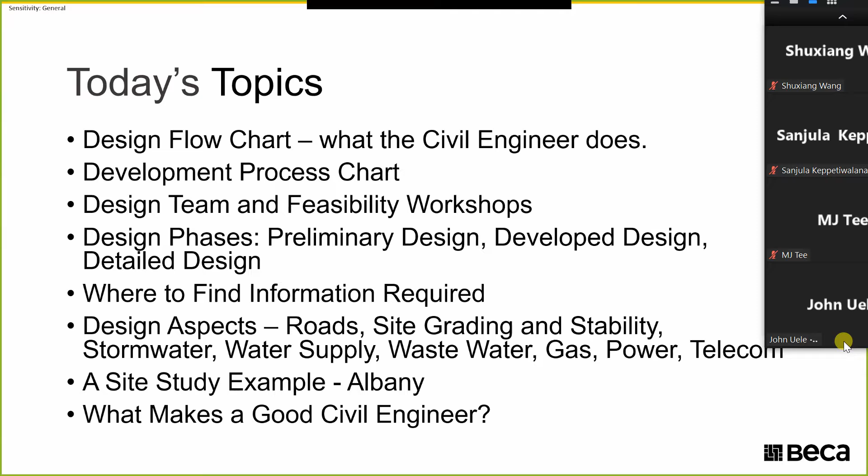So today's topic: Kerry will go through the design flow chart, what the civil engineer does, and explain the development process with a chart. The design team - people you should generally consult and involve for a subdivision project - step-by-step of the feasibility workshop, the 3 design phases: prelim, developed, and detail. Within these design phases this also includes consenting processes, and where to find information on the site and for the design. Kerry will then talk through a site study example in Albany, which we had previously done, and finally our 2 cents on what makes a good civil engineer.

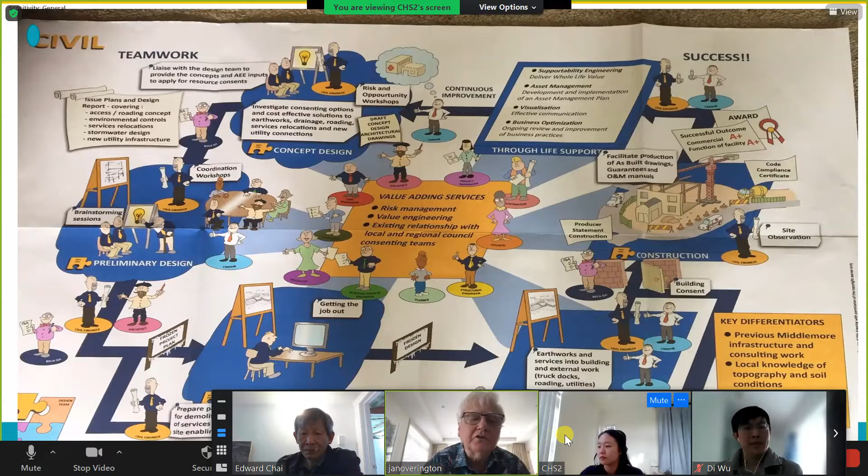It's probably at the developed design stage where a good portion of the work is done, probably 40 to 60% of the work is done during the developed design. That's when you're making sure that what you want to consent can be built and does meet the council's and approving authorities' requirements. Once you get a resource consent, you don't want to have to change it because something has gone wrong or something's too expensive. So you're putting your money into that phase so that when you go forward with consenting, you're in a good position to know that what you're proposing is pretty robust.

Then you go into what they term the detailed design, which is more pulling things together to enable you to tender the works. This would be done at the same time as you're consenting the works. So as the developed design has been developed and it goes off to council for approval for consent, you're then working on the detail, the much finer detail, and the contractual requirements to come up with a contract and a builder to enable the works to be done.

And then we go from the detailed design tendering stage, you then select a contractor who starts to build the works. And then once they're built, it's the approval of those works back to make sure that they've met all the consent conditions, the engineering conditions, and the legal conditions. So in essence, that's the process. I just felt that diagram was probably a good graphic way of indicating what you're doing at each of these phases. We'll expand on that more later.

So that's a flow diagram and the normal way that a design is carried out with those preliminary, developed, detailed - it's the concept feasibility, preliminary, developed, detailed, and then into construction. And then, don't forget, after the construction, the most important part is making sure that you can then get sign off. It's a little bit like getting code compliance for a building.

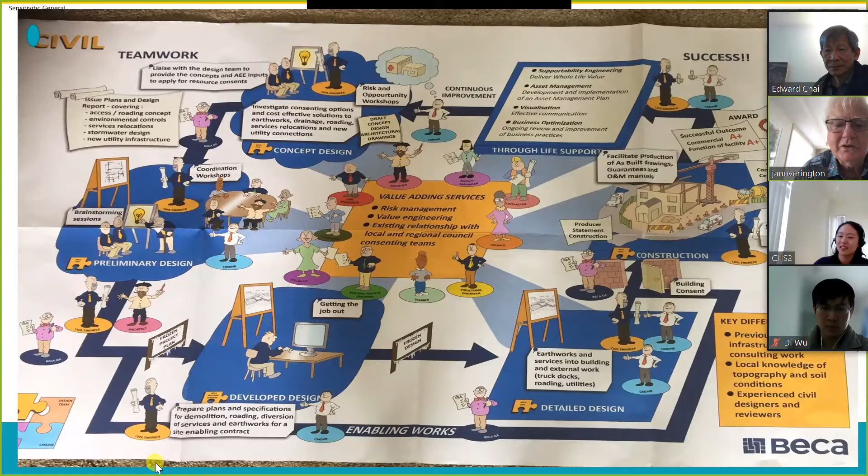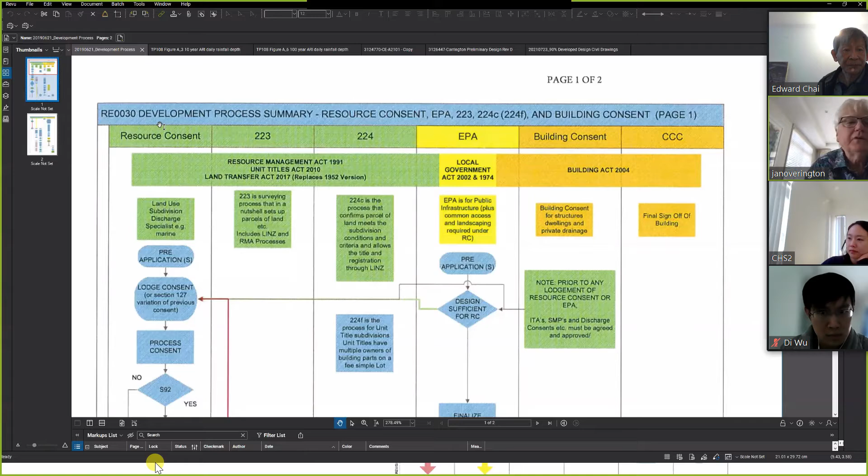This slide here is from Auckland City's design manual, and it's a really good flow chart to tell you what each phase of development is. So on the top left there, you'll see it's got resource consent. So that talks about what you do to develop the resource consent, and it's got the prescribed processes.

So when you get down to where it says S92 - S92 is Section 92 of the Resource Management Act - that's a process where if council feel that they don't have enough information, they will request more information. At that time, the processing of the resource consent stops until the developer, engineer, or planner has satisfied them that they've got the information that they were requesting, and then it'll start again. So when you see things like that, the S92, it's usually relating to the acts that part of the work is under. Now we'll go to the next heading.

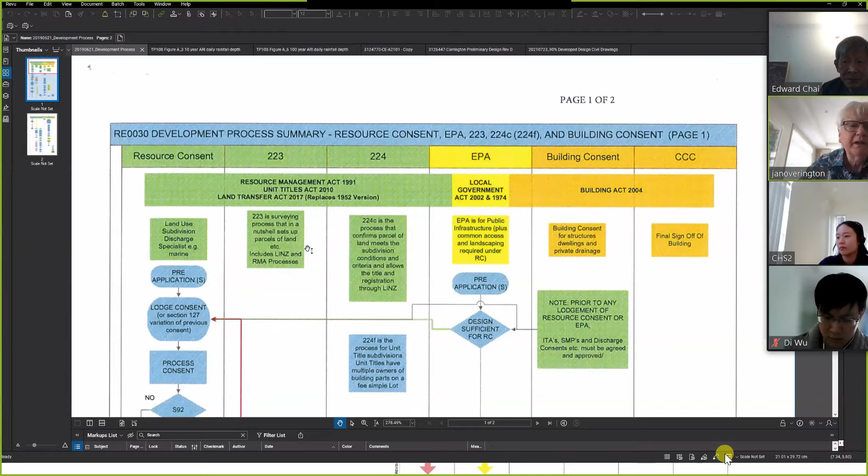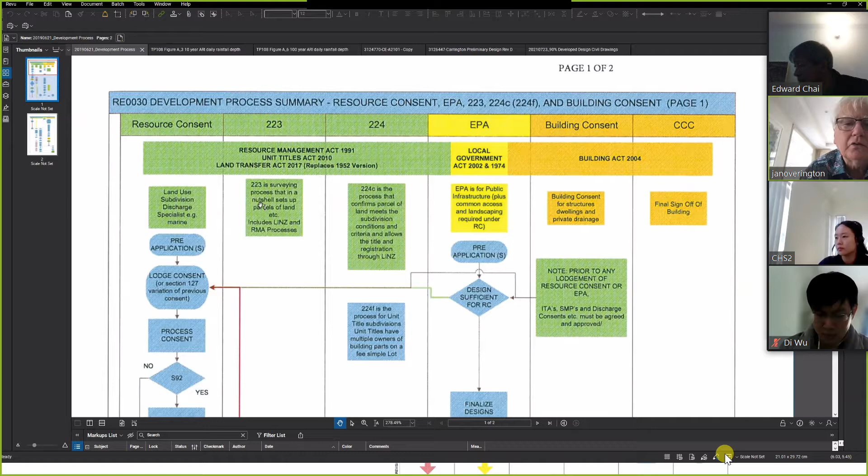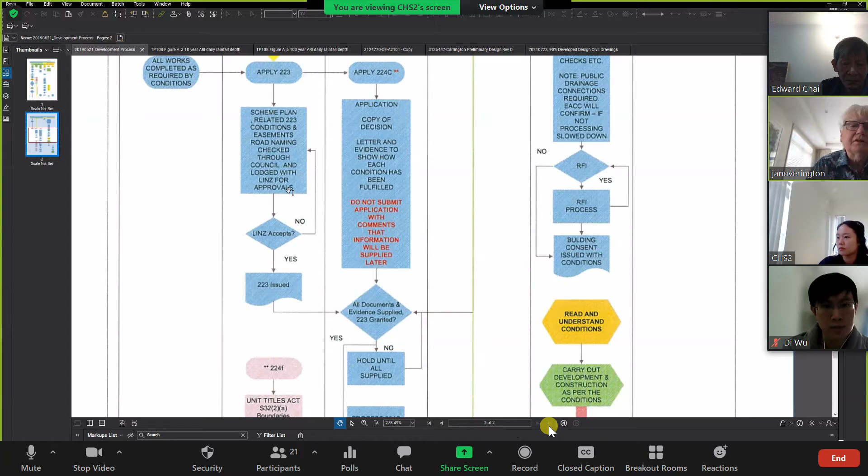You'll see it's got 223. Now under 223, that's the Land Transfer Act - and in fact I thought it was the Local Government Act. I think it is the Local Government Act, I'll have to check on that. 223 is a survey issue, and that's when you draw a scheme plan for, say, a subdivision, and you've got certain requirements - there has to be a certain minimum size, it may have to be a certain minimum shape. That's when the surveyor draws up a plan, and it's that plan, once it's consented, that the surveyor has to submit, probably when the works are completed, to obtain what is called a 223 certificate. That certificate says that layout of that subdivision is in accordance with what was approved. So that's just a technicality - the engineer doesn't really get involved with the 223.

Of more importance is the next column, which is the section 224. Now, the 224 is related to all the conditions of consent. The conditions of consent could be that you've got to plant trees, that you've got to do some offset planting somewhere - there's all sorts of conditions.

You'll find that a recent subdivision I was involved in had 180 conditions of consent that had to be met by the 224C. So that's quite an important bit of work. That means you have to have all the engineering works done and signed off, so the council are involved, and it's the engineer who submits a 224, actually a 224C, they call it.

Oh, there it is there in green. And there's a 224F for unit titles. So that's quite a complicated process, and it's one that's very important to the client because it occurs at the end of the works.

And if the contractor hasn't built things properly, and there's delays while he's getting it fixed, what happens, particularly in a subdivision, is there's a delay. That delay means he can't get title to the land, and therefore he can't get paid for the sales he's done already. So that's quite important, because when it becomes big blocks of land, there's a lot of money involved. So 224C is a very important step in the process, but it comes after all the works are done.

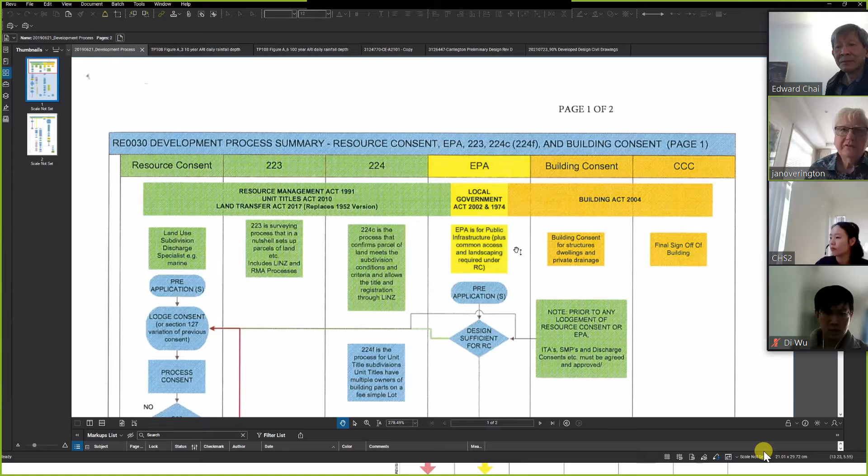Next one we have is a building consent. You've also got to get building consents for structures. Now, structures mean retaining walls, buildings - generally manholes, which are structures in the ground, are not deemed to require building consent. They're done under the EPA approval system.

But the other issue where you get building consents is any private drainage. So if you're running a public system that the council are going to take over, but part of that development is to put a private line in to serve a house up the hill, that may exist, and if that becomes a private line, you need a building consent for private drainage. So building consents aren't just for structures, they're also for private drainage.

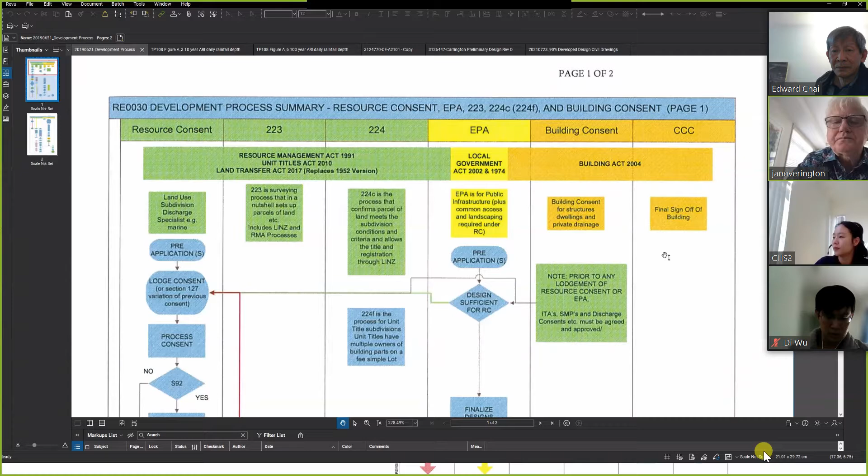And then we go to the next one, which is CCC, that stands for Code Compliance Certificate. The Code Compliance Certificate is when you get a building consent - it's the sign-off that the building structure has met its conditions and has been built in accordance with the design. So that's the Code Compliance Certificate.

And you normally need a Code Compliance Certificate before you can occupy a building. So that's the process, and we're providing that chart to you. That is within the Auckland Design Manual, but it does give a good example of the flow of how the engineering ties into all the requirements of the Resource Management Act, the Local Government Act, the council requirements for assets, building consents. I believe that's quite a good chart, and you really do need to read through it to understand what the process is. Thank you.

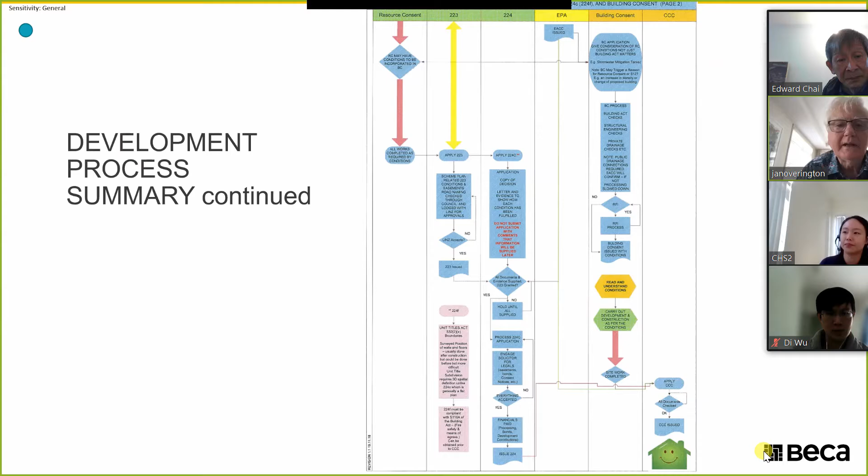I guess the first important thing is to identify your piece of land or property and what zonings they are in. So this is the Auckland Unitary Plan. In here you'll be able to read the plan and view the maps. So if you click on view the maps, you'll see an area of your site.

So for this instance, I've picked this Massey University, which Kerry will later talk about. So in here, there's a lot of information in this list. There's some layers where it shows information - urban boundary, precincts, overlays - and all of this information then you can see a description of what they meant.

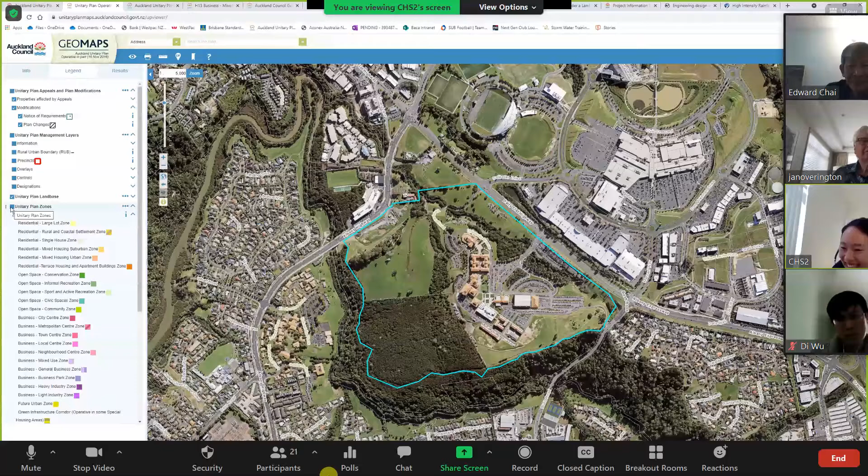So what we're interested in here are the unitary plan zones. This piece of land, what zone is it in? If you click onto here, you can see Massey University is under a purple zone.

It lists a business mixed zone. You can click onto this info button to get information of this piece of land, such as address, legal description, and the zoning, which is what we're more interested in. So it's business mixed zone, and from here you can read the plan, which shows all the description and information of the Auckland Unitary Plan.

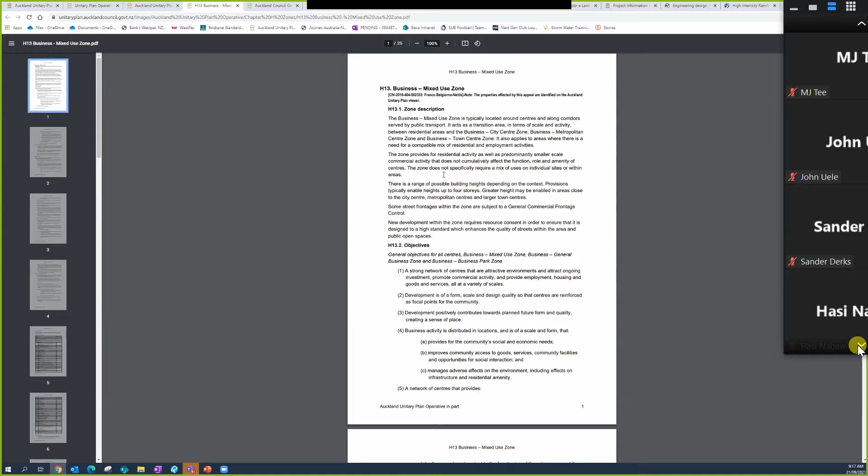So we're interested in the zones. This is business mixed zone, and if you click onto here, it describes the zone and gives you an objective so you can understand the purpose of this zone. If you scroll down, you'll see the activity table, which tells you what you're allowed to do and what you're not allowed to.

So you can put in dwellings, that's permitted. You can do conversion of a building or part of a building to dwellings, residential development, visitor accommodation, or boarding house. RD is restricted discretionary. Discretionary means maybe—it could be granted or refused.

If you plan on applying under the discretionary activity, the resource consent process will assess the condition in terms of the relevant provisions of the plan, objectives and policies, and also review it under the Resource Management Act. Cinemas are non-complying, so you're not allowed to build a cinema.

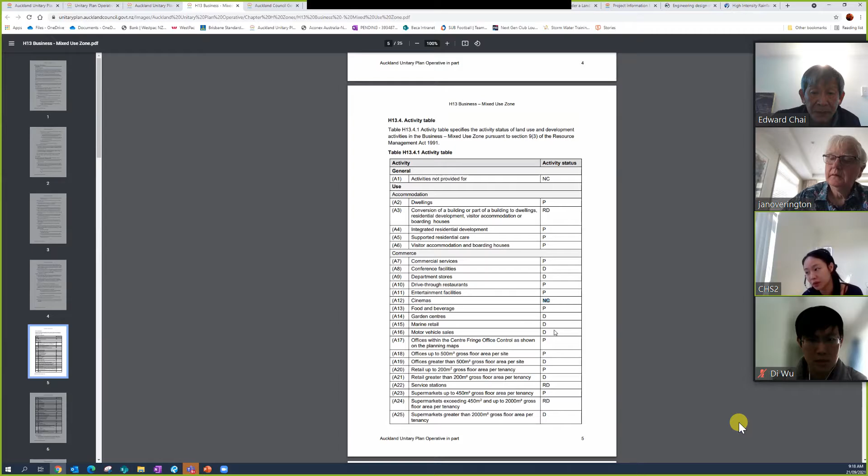So there's quite a bit of information here on what kind of commercial business you can actually work on under the business mixed zone. What do we have next?

So we have the Auckland Council GIS map, which is this. Again, I've zoomed into the Albany Massey website. In this Auckland Geo map, there's a lot of information. There are different types of aerials, a gray canvas depending on what you want to do with them and how you want to illustrate your information, and terrain.

If you move on to the next tab, you have aerials, and it will show you a list of historical aerial imagery. If you click on that, that's the aerial from 2006, and moving on, that's 2003 and 2004.

We have assets, which is probably the most important information that we would be acquiring. So the Auckland GIS map is a site that contains spatial and non-spatial information across Auckland. It's free, and most importantly, it's great.

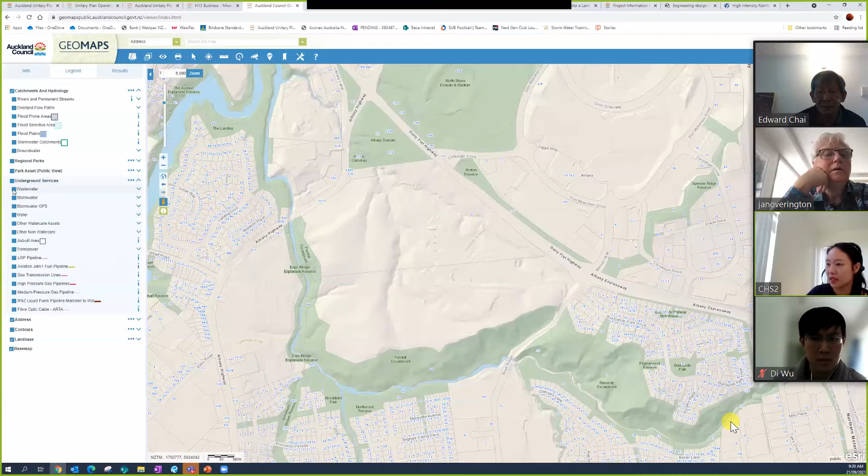You can go in and look at where the overland flow path is with a click, and all of this information is just in this website—where the wastewater is, stormwater, water.

You can also print them in PDF, choosing size and low quality or high quality, and if you want to include underground services combined, it's really handy. And then you can do your measurements.

You can also extract information, then click onto the layers that you want to download and put it into your drawings. Usually you choose your coordinate system, and then you can choose—oh sorry, I think I zoomed out.

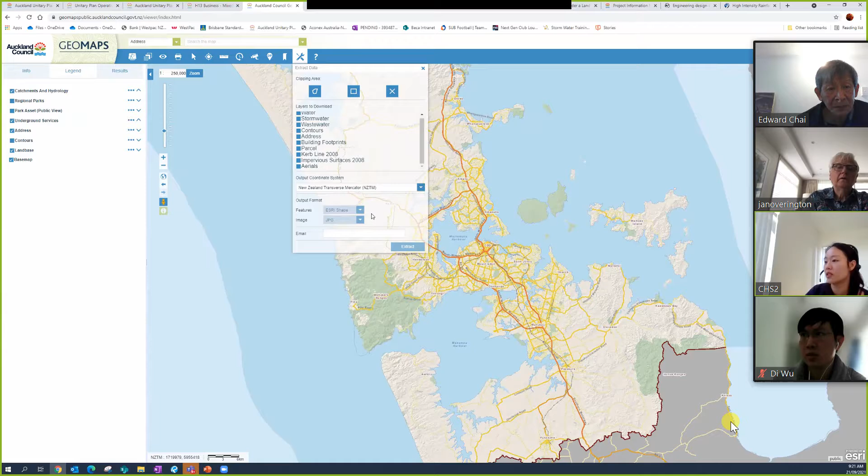If you do this, okay, let's just say there, you can click on the type of file you want, whether an XML file or an AutoCAD file.

What do we have next? Oh yes, there are also contours. Most importantly, it's information from the council LiDAR, which is sufficient for you to work with at the start of your project when you don't want to spend money on having a land surveyor come in and do a topo survey. So this would be sufficient for the initial stage of the design.

And there's one more thing—Retrolens. Again, this is for historical imagery, and it's more detailed with dates. You can click on it, so that's your Massey University site. You can click on 1998, and compile the information you're interested in. That could go up to, looks like 1940, which is just a green piece of land.

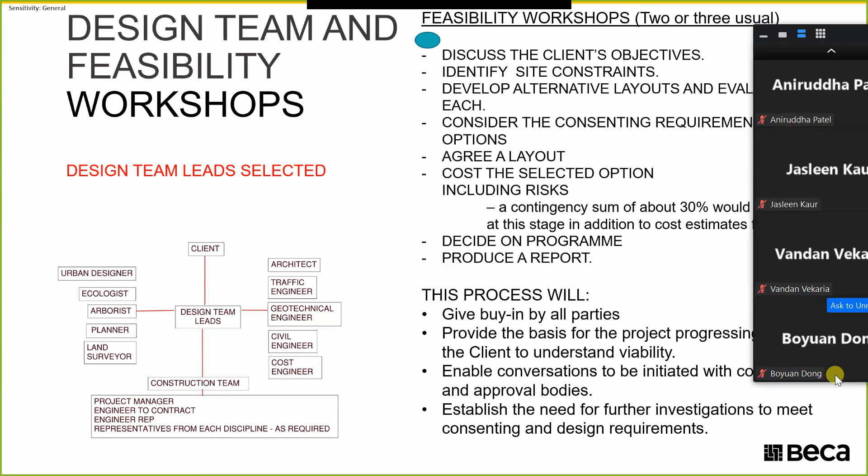Normally we would get a team together like that team on the left-hand side of your screen with all those people. Then you go into a workshop and work through to discuss with the client - and it's important that the client be there - his objectives. What does he want to do? Does he want to build, does he want to subdivide land and build houses on that subdivided land and then sell the completed project? Does he want to build apartments? Does he just want to subdivide the land and sell it? So you need to understand his objectives.

Then the next thing to do is to identify the site constraints. We'll go through an example of what the sort of constraints can be. I was looking at that Flat Bush site that you were doing an exercise on - it's very flat. So what are the issues with a flat site? There's no stability issues, but it does have a watercourse running down through part of the land. So how does that affect the development?

Then the other constraints are - are there services to the site? How are we going to connect power? How are we going to connect sewer and water supply? All of those things - so you look at identifying the site constraints.

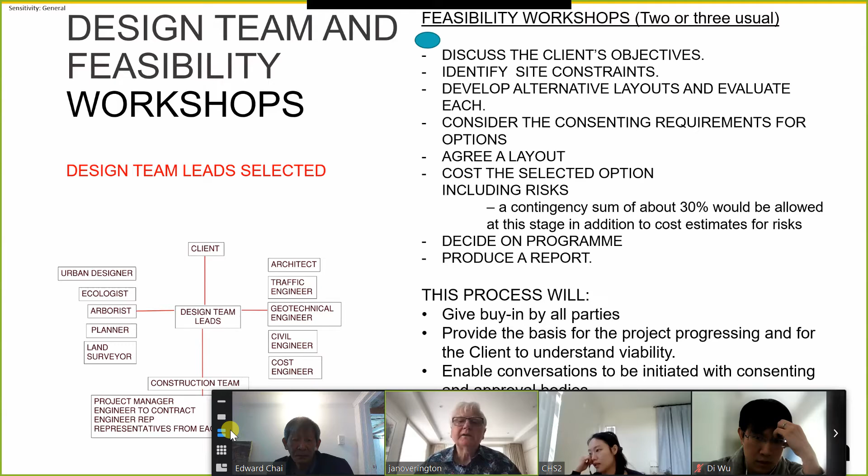The idea is then to develop alternative layouts and assess each of those. As I said, these are usually done in workshops, and I'd suggest only 2 or 3 workshops, but they're interactive. Everybody comes along prepared based on their own expertise on the constraints and their thoughts on how the land could be developed. You listen to the client, and then all together you come up with a design.

You consider the consenting requirements. Consenting is a long process, an expensive process, and there could be options. For instance, are you going to go for the minimum lot size and maximum earthworks? That could have an impact of some adverse effects on filling watercourses or something like that. So you consider the consenting requirements and their options.

Then the idea is to come up at the end of this exercise with an agreed layout that everybody agrees is a good compromise or a good way to proceed, and the client agrees as well. Then you can cost the selected option.

You don't only cost the works that have to be done, but you also include the risks. Firstly, you've done virtually no design, so there'll be a contingency risk. That contingency, because you don't know all the issues, would be in the order of 30%. So if it was a $100 million job, you would be adding $30 million as a contingency. That's the sort of order you would use at that stage.

And then you would also cost the risks. If you know that, say, we're not sure if all of the site can be serviced by the existing sewer system, we may have to put a pump station in. So at that stage you would allow a cost for a pump station. You look at all those sort of risks that you have.

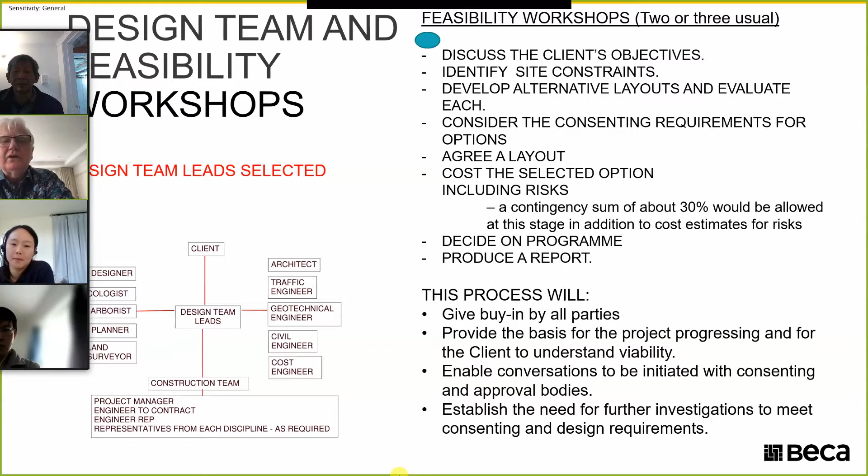Partway through the works, once the program's decided, it would be over to, usually driven by the civil engineer. The civil engineer would then produce a report that pulls together all those discussions from the workshops, and the report would then include the costs.

This process gives buy-in by all the parties, because all the leads are there giving their inputs. So if anybody was really unhappy with the site, some aspect of the layout or whatever, that would have been decided during that process. So it gives buy-in by everybody, and it provides the basis for the project to proceed.

That means the client can continue to look at his viability. This process won't tell him what to sell his lots for, but it will allow him to now go and seek other advice so he can look at the viability of his development.

It also enables conversations to be initiated with the approval bodies, and it establishes the need for further investigations required. Having looked at the risks, those further investigations will be geotechnical, ecological, looking at the health of watercourses, could be an arborist. So all of those issues that have come up will be part of the assessment done, and will lead into doing the further works and identifying the issues that need to be addressed.

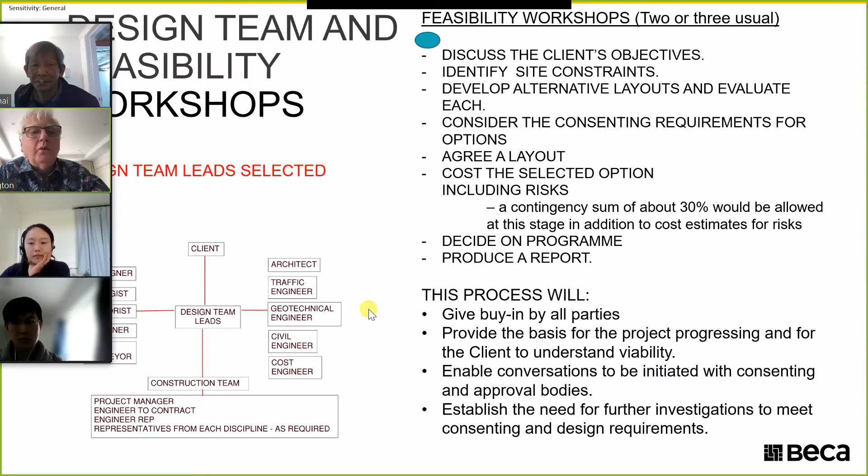Okay, I'm just going to touch on the boring stuff. Here's a list of standards and guidelines that civil engineers refer to for design. So, the Auckland Council Design Manual - this manual gives you good guidance and also explains the importance of good design. This guide sits alongside the Auckland Unitary Plan, which I've already touched on.

Auckland Transport TDM is the new manual. They've recently come out with this new manual as a replacement for their previous technical manual called ATCOP, Auckland Transport Code of Practice. Be sure to refer to the newer design manual, though you can still find the old manual online.

For the new manual, just search for Auckland Transport TDM. The design manual has design information related to Auckland Transport assets, such as footpath width, wheelchair access, bus stops, curb and channel, and traffic islands.

Watercare has a code of practice for water supply and wastewater, which we heavily rely on when designing both of these services.

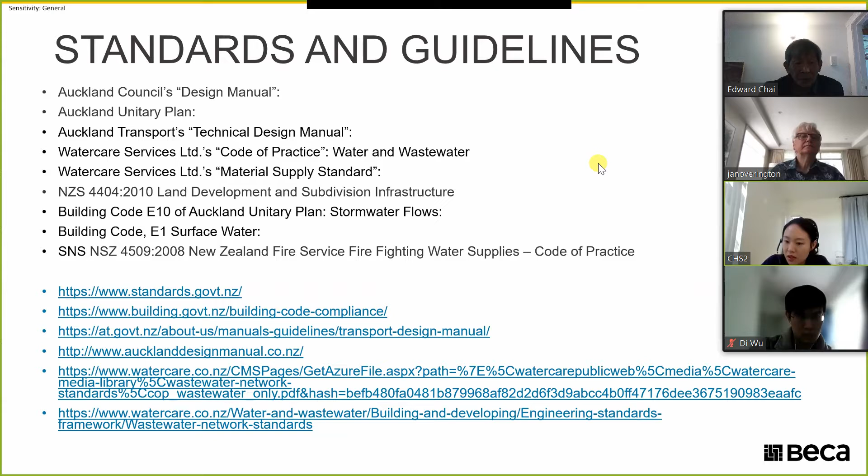NZS 4509, the New Zealand Fire Service Firefighting Water Supply Code of Practice, we'll touch on that later. These are your basic standard guidelines that you would refer to when doing the design.

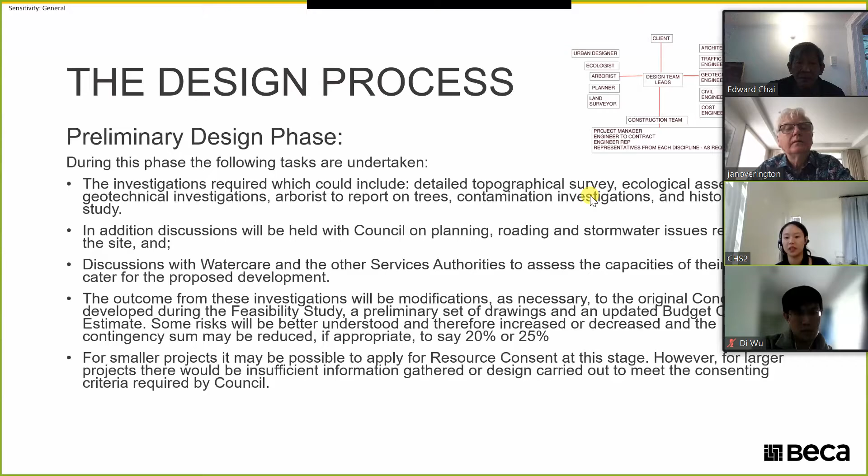So the design process: the preliminary design phase. These are the following tasks to be undertaken by the design team, which we've previously mentioned in the design team chart - detailed topo survey by land surveyor, ecology assessment by an ecologist, geotech by geotech, arborist on trees, contamination investigation, and historical site study by environmental planner.

While these investigations are being performed, discussions shall be held with the council on planning, roading, and any stormwater issues related to the site. You should also have discussions with Watercare and other service providers to assess the existing capacities of their assets. During this preliminary design process, the client would be interested to know the estimated cost.

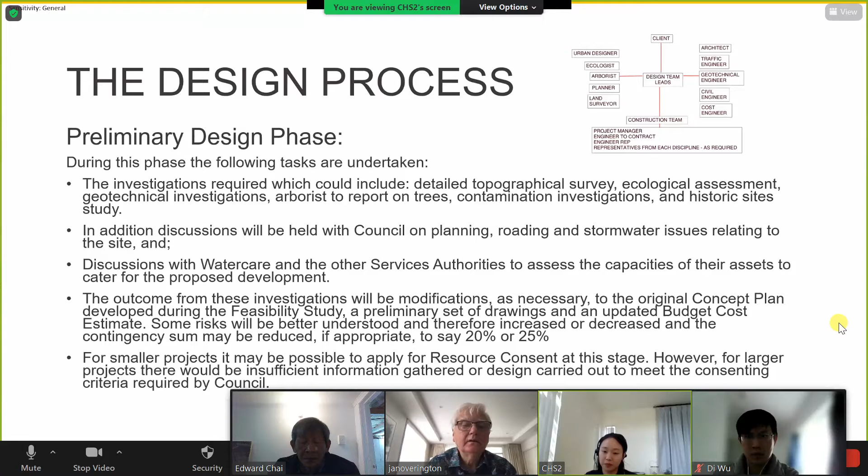So that's when the cost engineer comes in. The outcome from this investigation will bring modifications to the original concept developed during the feasibility study - a preliminary set of drawings and an updated budget cost estimate. Some risks will be better understood, therefore increased or decreased, and the contingency sum may be reduced.

Say 20 to 25%, depending on the size of the project. For a smaller project, a resource consent can be applied for first using the preliminary design.

The developed design - this is the stage where all the fun stuff happens. The design and information provided needs to be sufficient to meet consenting expectations. That's quite a bit of information you need to prepare, and whether or not the items required to be consented can be achieved.

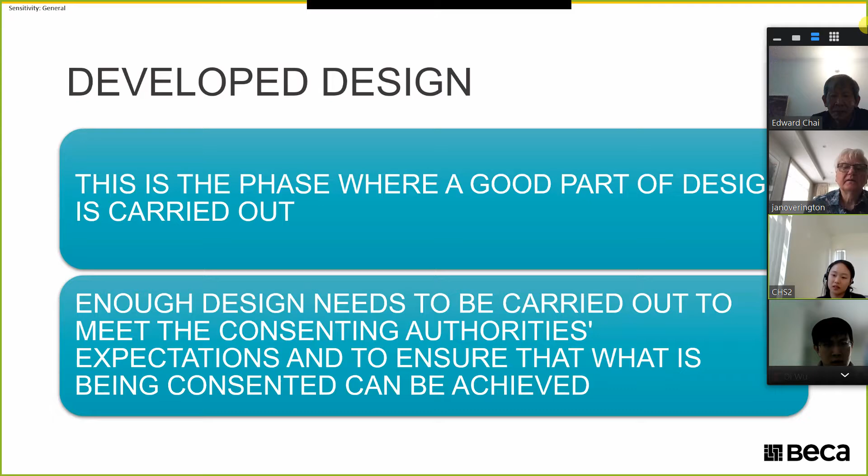So what are the fun stuff? The subdivision roading and road layout - there's quite a bit of thinking there, as you want to maximize every lot, every subdivision lot that you've planned on, and you also want to make sure the lots are positioned such as north facing.

If there are any contamination issues, at this stage the issues should be sorted. The amount of earthworks required needs to be determined. We use software such as 12D and Civil 3D to grade the terrain, and from there we can calculate the amount of cut and fill required for the site. I believe these two software are the ones Unitec teaches.

And sediment controls, you will need to know already how it should be handled. Usually the sequence of work shall be recommended, the type of erosion controls, usually prepared in a report and a set of plans. Geotech assessment, if the site requires retaining walls or ground improvement - if no retaining wall, you may have a smaller geotech assessment report.

Staging of works - if it's a big piece of land, you would want to split the work into stages. If there are any ecology issues, flora and fauna issues that need to be resolved, it could involve removing a water course and offset measures.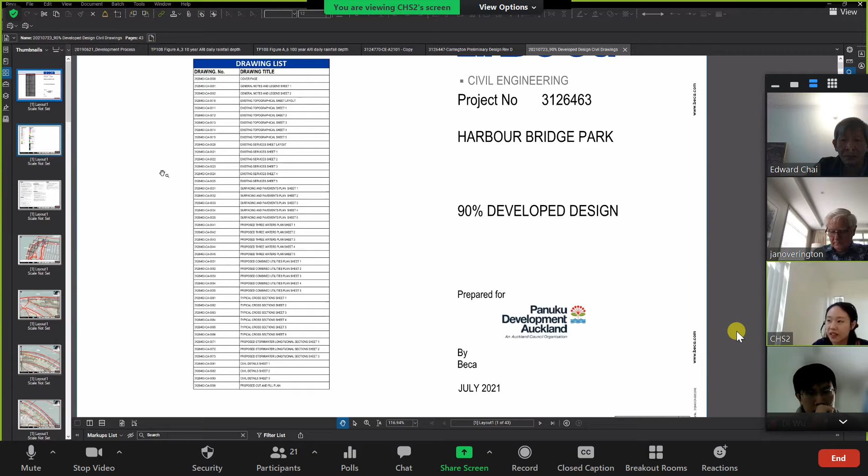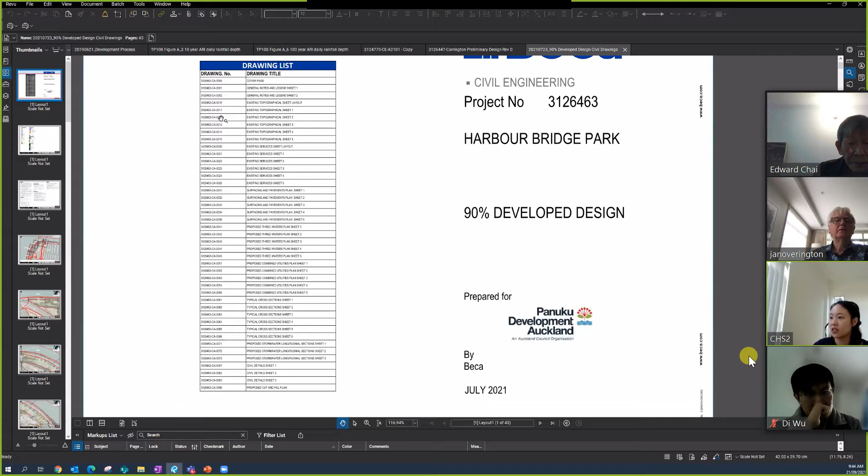So this is a site. I'm just going to talk through the information we've provided. We have the general notes and legend, and topography survey information, which is what a land surveyor would provide. Some contours, existing contours, chamber information, curb and channel, light poles, and then you will want to show your existing services information.

So it is a busy site, there's a lot of information. Oh sorry, I should introduce this project just quickly. This is a project on Curran Street, just near the Westhaven Marina. This is State Highway 1 heading towards the bridge. So this is what we are upgrading, this area into a nice public realm so people can hang out.

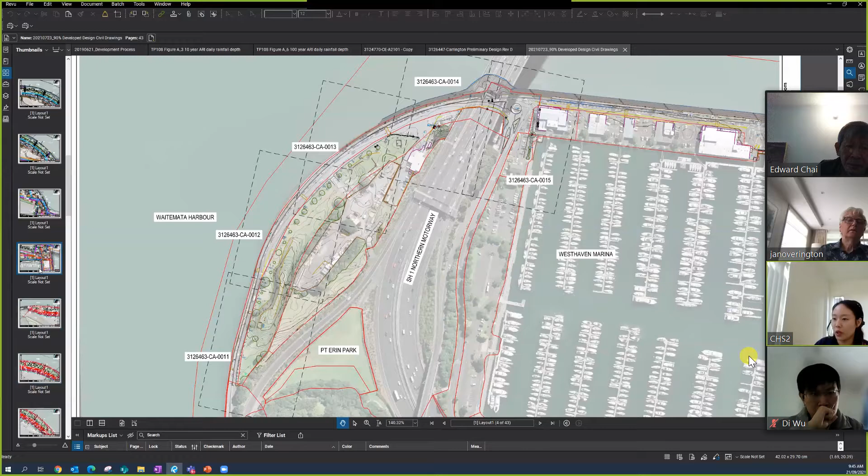So where was I? I was up to services, and we've got pavement and surfaces. So this is the design grading that we've graded, and pavement information. So the pavement surface, you would see what you'd get, so you can understand how much earthworks is involved. That's a fair bit of cost in there, and pavement is also quite a big amount of cost, so you will want to identify that piece of information, what type of pavement.

Sorry, I'm just showing you the first page of the project instead of going through all of it. We have the three waters. Here we have proposed putting in a swale that is next to the carriageway as part of a low impact design approach, which is something I will touch on for the stormwater bit. And then we have cross sections.

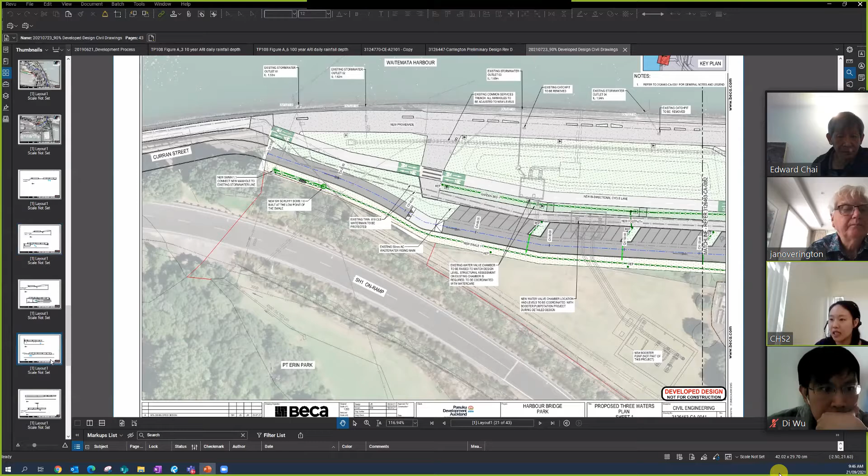We also have some long sections, since we've got all the information already, as said that we should have the pipe outfall discharge, where water should be going into and at what level.

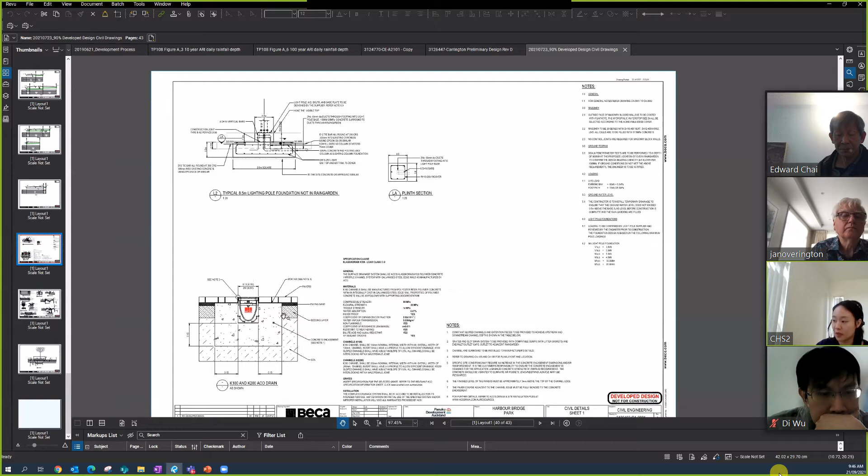We also have some information, because this is a 90% developed design, we have some details for the cost engineer to cost up. These are big items such as the light poles, swale details, garden bed, pavement information. This is the garden bed.

So these are the information that I've provided for this 90% developed design for this job. This is not a subdivision, but I thought I'd just show you what kind of information and drawings you would want to prepare for the design stage. These would be fairly typical of a developed design, which is quite detailed, as you can see.

Moving on to the detail design. The detail design is the phase where the design is refined further from what you can see, and then we're just adding more information and completing it with more coordination with other disciplines.

And then from there, you have your plan, specification, and estimates created. This phase is where the full cost of the project is identified. Then you'll have your drawings to be completed with specification, which is really important.

Conditions of tendering, conditions of contract. The tender documents will typically include a schedule of price, health and safety requirements, quality assurance requirements, conditions of consents, and condition of the contract. Once tender documents are being prepared, an application for engineering plan approval will be made to Auckland Council.

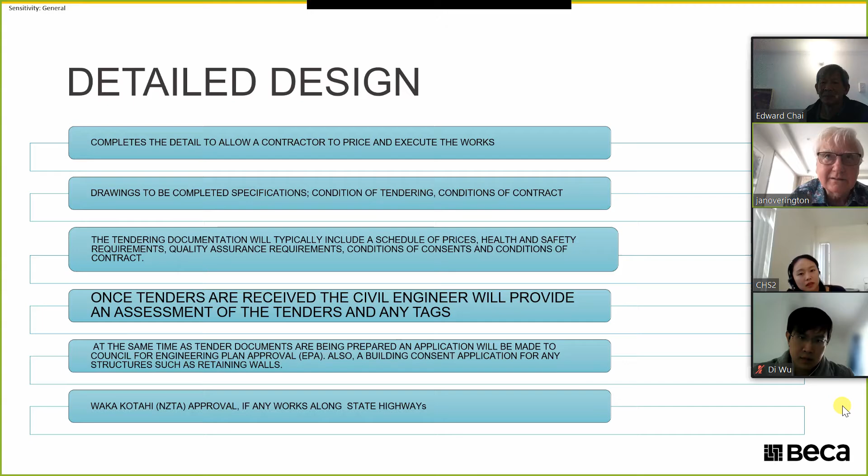So typically, when a contract is let, most bodies like NZTA or councils would have a 15% contingency still within there, because there's nothing worse than kicking off on a project, finding out there's something that hadn't been discovered, and having to go back for more money, right? So, costing and the costs are pretty important.

Okay, cool, it's now 10:02. Joey, do you think we should break here? Yeah, what do you think? Well, I think we can have 5 minutes. You want a 5 minute break? Yeah, that'd be good. I think we took a bit more time than we practiced. Okay, after we start and run it, and then at the end we do question and answer. We'll be back in 5 minutes, okay? Let's keep the recording. Let's continue. I'll get a coffee.

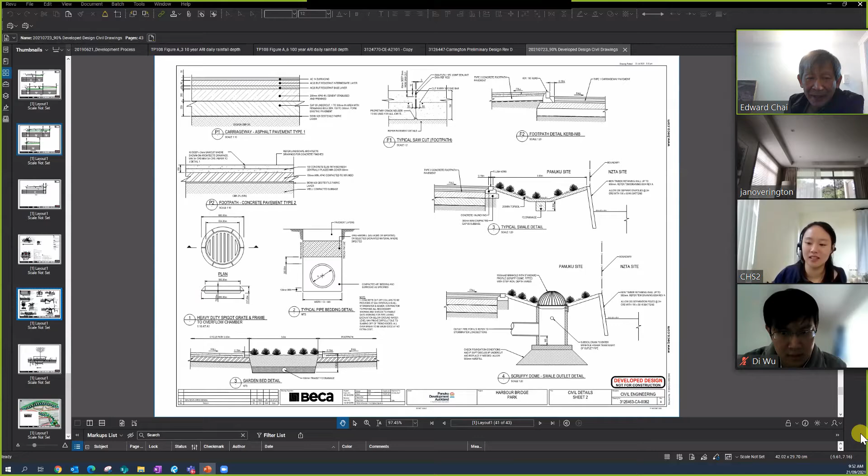So I might swiftly go through the rest. I don't have to, I mean, I can talk quicker. No, I think we're okay because we've got a little bit of time at the end as well. We're just making sure that we cover all the topics we have. Yes, I think it's very informative, a lot of things, because even though we have class every week, I don't go into so much detail. So I think it's really good that after this I can send... is this the one you're going to pass to me? Yes, I will send the PowerPoint, but I'll have to remove the watermark first. Okay, sure. I'll run it to the Moodle for all of them to see. Okay, because we did prepare the PowerPoint in a way that they could look into it, that's why we had the links of where to find the information. I'm just gonna jump back out and then I'll come back in. Okay sure, so it's 5 minutes.

I think I've changed. I'll just mute it now.

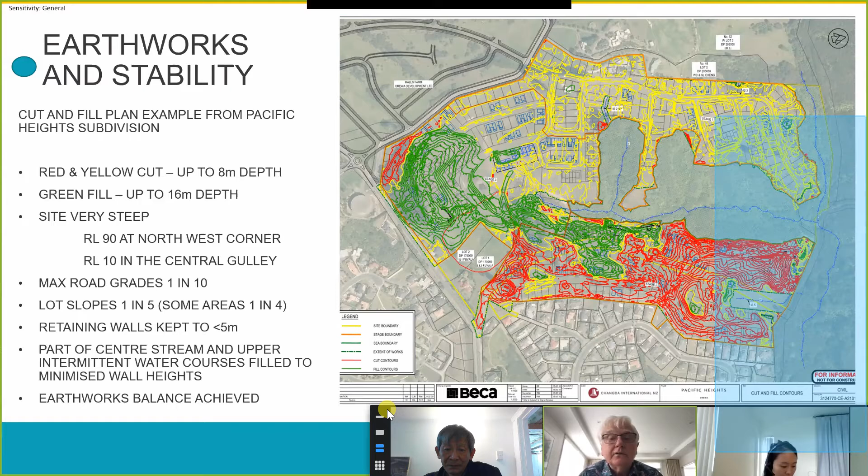Okay, next one. Earthworks and stability - this was a project that Beca did, in fact the Pacific Heights development in Orewa. The yellow and the red are depth of cut contours.

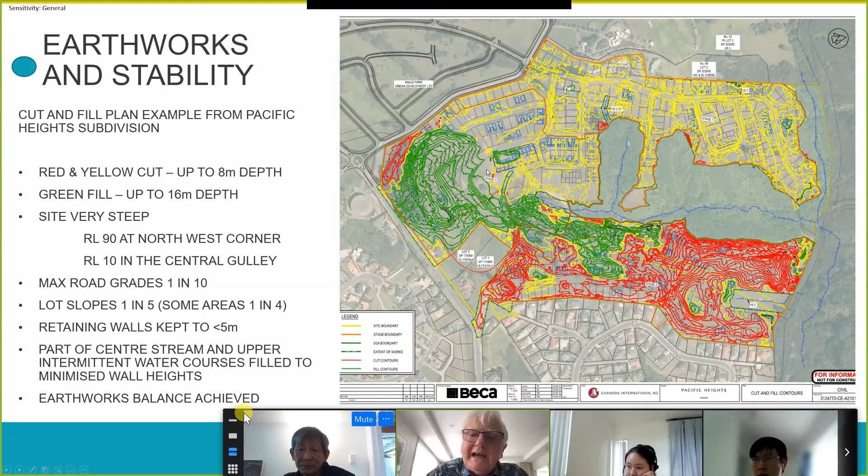The distinction is that the yellow was all stage 1, the red is stage 2, and the area through the middle is stage 3. So the cuts and fills - there were cuts in the yellow and red of up to 8 meters deep, which is quite significant. This was a very steep site.

The green is fill, and there's a gully running up through the site - that's the blue line running up through the middle. There were fills up to 16 meters deep. If you look at the top left-hand area where there's red, that was RL 90, and down the bottom of the site where the stream exits to the next property, that was RL 10. So there's 80 meters of fall across the site - that's a pretty steep site, right?

It had ground slopes of 3 to 1, and had some slips within it that had to be looked after - that's old ground movement.

So that site was developed with lot slopes, meaning the slopes across each development site of about 1 in 5, which is what you need for access off the road, with some slightly steeper areas at the back of the sections of maybe 1 in 4. Maximum road grades of 1 in 10, as the council requested, and retaining walls kept to less than 5 meters.

To achieve that, part of that central stream - the top end, the big green area - had watercourses that had to be filled in to achieve that balance of earthwork shapes that were desirable while keeping retaining walls to a minimum.

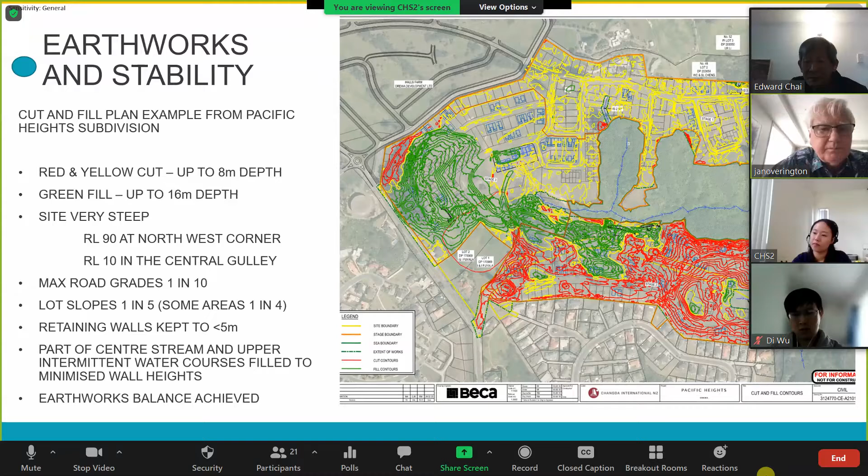The rubbish tip itself had been investigated and was up to 10 meters in depth. As part of the consenting, there had to be a leachate collection system and a methane gas protection system, meaning perimeter drains around the existing landfill. It was covered over further, and that meant settlement. Council in the end wouldn't take over the bit of roading that goes through the toe of the landfill, and that still remains in private ownership of all the sections within the development.

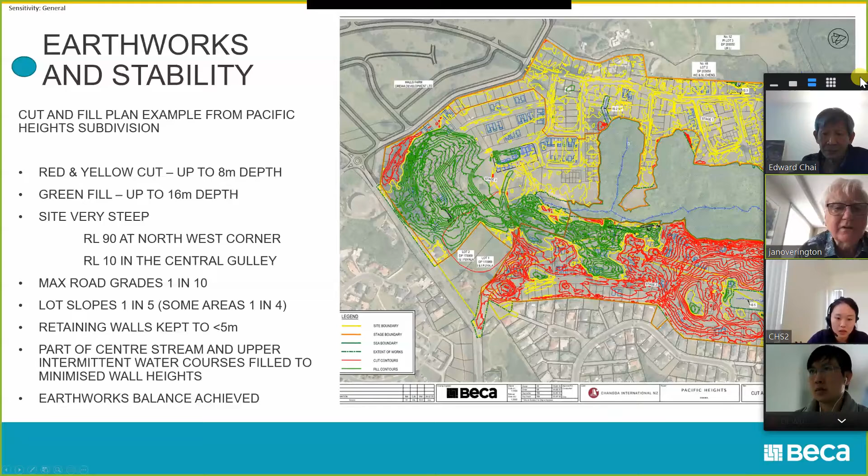Okay, next one. And now we're into stormwater. Yep, so on to stormwater.

For smaller rainfall events, you use the volume control method - things you'd do to make your water disappear, like reusing it, infiltration into the ground, or slowing it down and holding it using an orifice, which is detention. First flush is what I call the day-to-day stuff, managing stormwater quality - that's your stormwater treatment, which picks up contaminants and hydrocarbons from the road and treats them.

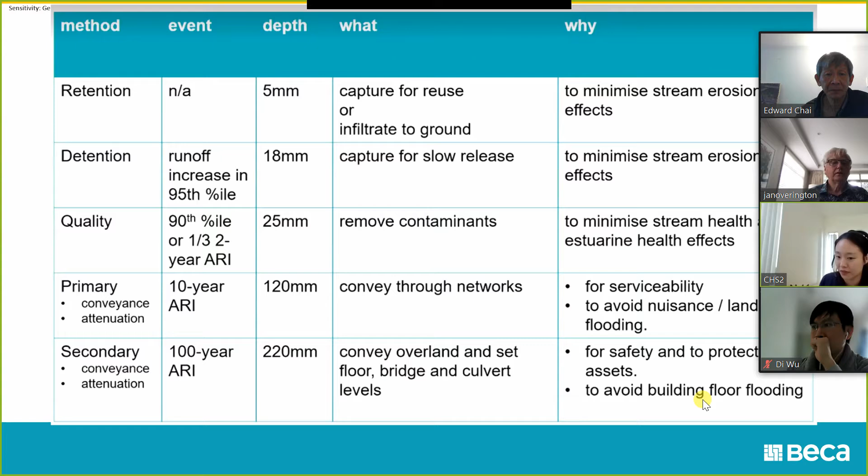Primary method is to convey through networks, that is pipe and open conduit - this is for serviceability and to avoid flooding. Secondary is to convey overland flow and set floor, bridge, and culvert levels - this is to protect assets from flooding and for general safety.

So how do you capture runoff for reuse? Retention here is what we do using methods such as having tanks for toilet flushing, irrigation in roof tanks, or creating surfaces for runoff to infiltrate into the ground. Detention is the method where you capture the runoff, store it, and have a slow release over a 24-hour period through a calculated orifice.

So detention could be a swale, wetland, pond, or detention pond. The quality method is to remove contaminants - we usually measure total suspended solids, the TSS, at a minimum of 75%. This method is to minimize contaminants accumulated from the road surfaces.

The contaminants usually come off at the start of the storm, so you want to treat them at the start, and the rest you can bypass. That's just to minimize the size of the treatment device, because if you wanted to treat all of the stormwater, that would be quite a lot.

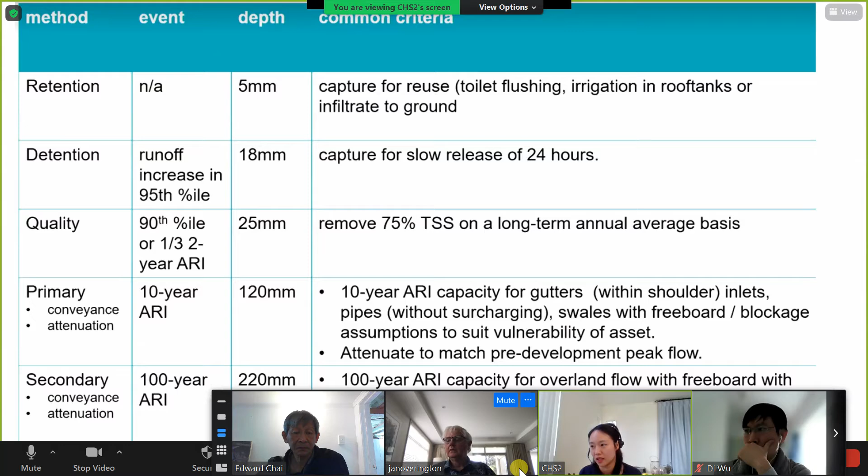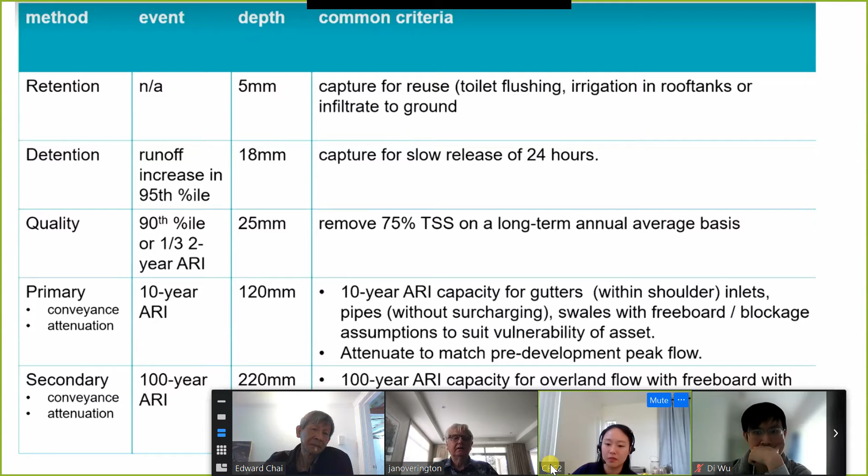For primary storm in Auckland, we usually use 10-year event rainfall to calculate the capacity for gutters, inlets, pipes, swales. This design also has to attenuate to match pre-development peak flow. For secondary flow, we use the biggest event, the 100-year rainfall capacity, to calculate overland flow path with freeboard. Also part of the calculation, we assume pipe blockage depending on the size of the pipe to suit the vulnerability of the asset.

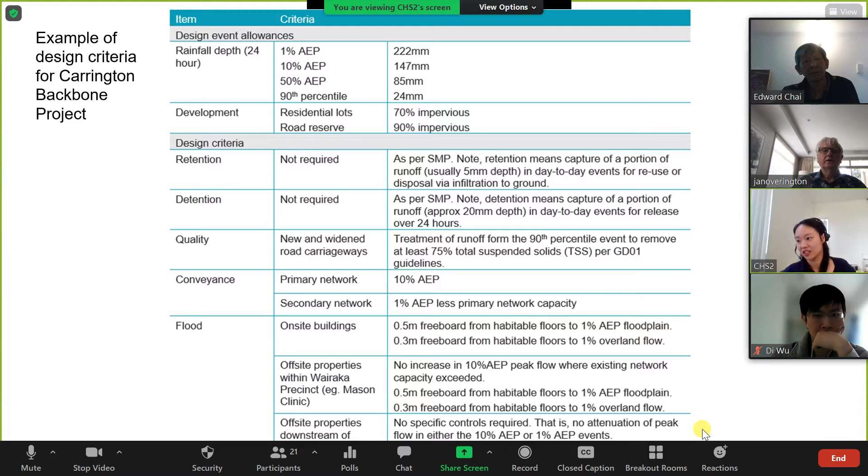This is an example of stormwater design criteria for a project that Beca worked on. This is a table created to capture all the inputs you would use for your calculation. It's just really easy that you could refer to them, and then when people ask you, oh, what's the rainfall? You're like, this one.

I'm just going to jump onto my browser and show you the maps and the NIWA website.

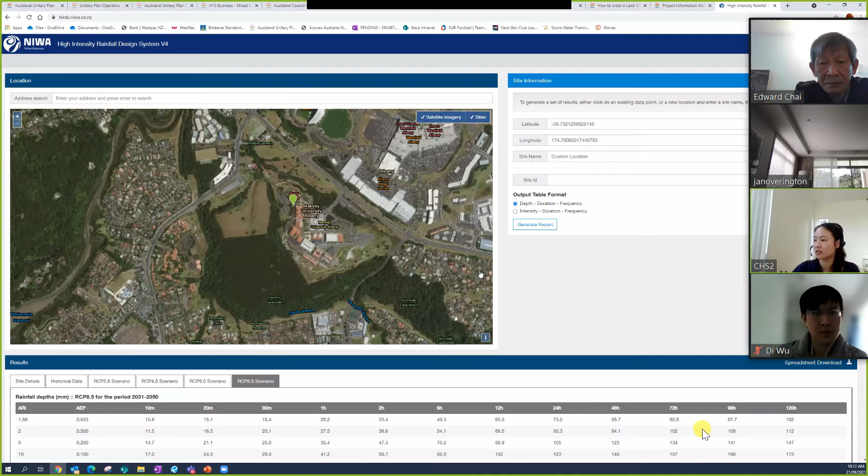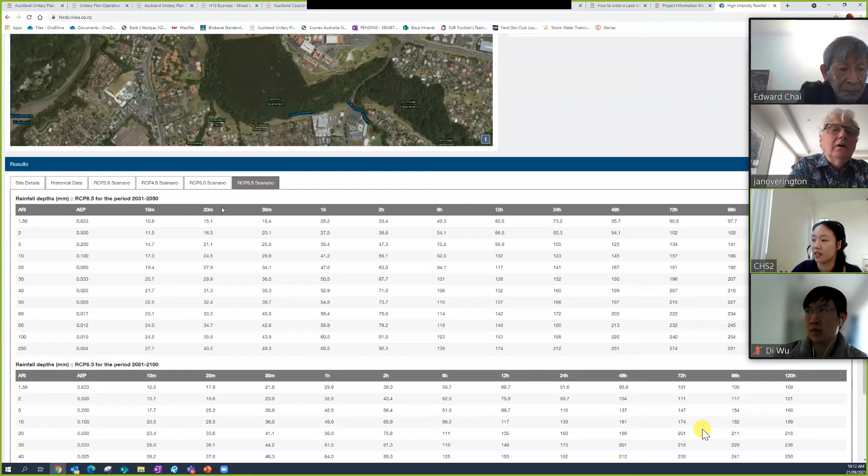And now to NIWA, I've picked the Massey University site. This website gives you the most updated rainfall data compared to the TP108 map, because that was dated in 1999. So from this website you can get the depth and the intensity. For this instance we're interested in the depth. I've already generated the report. There are different scenarios to look into, I won't go into detail, this is a whole other level of information, but ideally you would want to pick the 100-year event, 24-hour duration, and that would be your answer. Then you put them into your table.

Just jumping back onto my PowerPoint. So this particular site, the Carrington backbone which is next to the school, the uni, this particular site example is not under stormwater management area control, which we call SMAF. This is a control that seeks to protect and enhance Auckland's river and stream aquatic biodiversity in the urban areas.

Moving on, the primary stormwater system includes both open and closed conduits and is designed to cater for the flows generated by the event specified, in this case 10-year event rainfall. The secondary stormwater network system, as mentioned, uses the 100-year event.

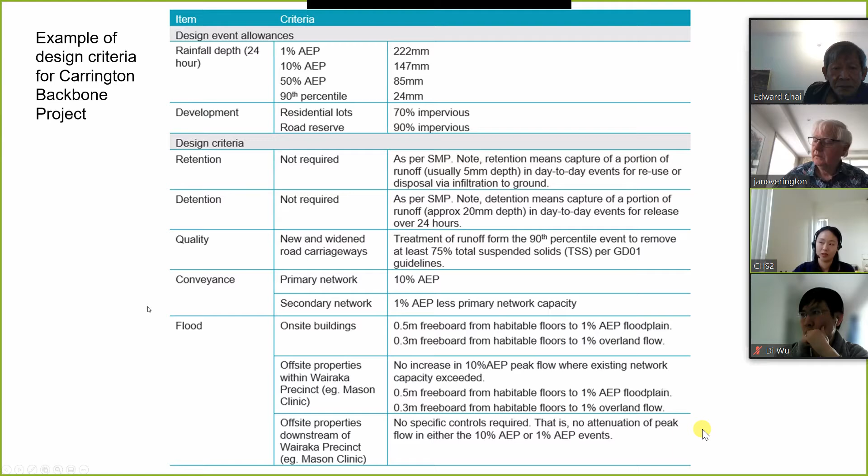This diagram indicates how to measure freeboard, which I previously mentioned. The minimum freeboard for overland flow path, as per the New Zealand Building Code E1, uses the flow generated by the 100-year rainfall depth. In this instance, the flood level is measured relative to the datum. From there you add 0.5 meter of freeboard. In this case it is a habitable dwelling. That's how you get your building floor level.

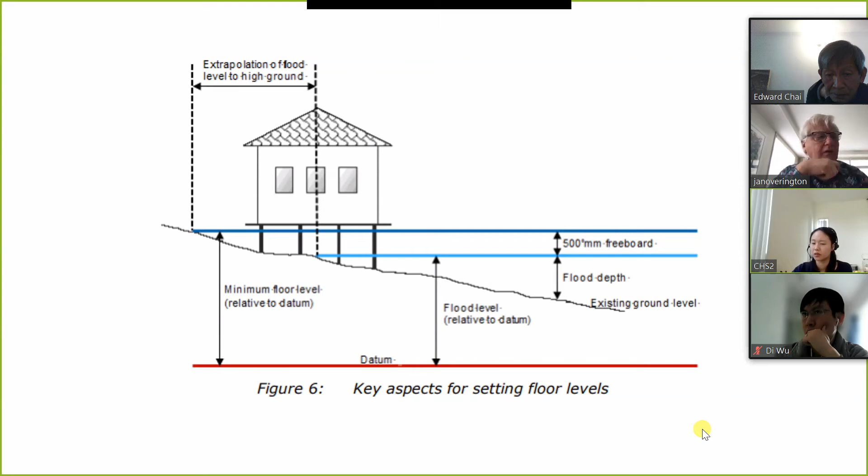There are other freeboard requirements depending on your situation, that is, if you're habitable dwellings or commercial and industrial, or non-habitable residential. They all have different measurements. I think the commercial ones are 0.3 meter freeboard, and then non-habitable is 0.2 freeboard.

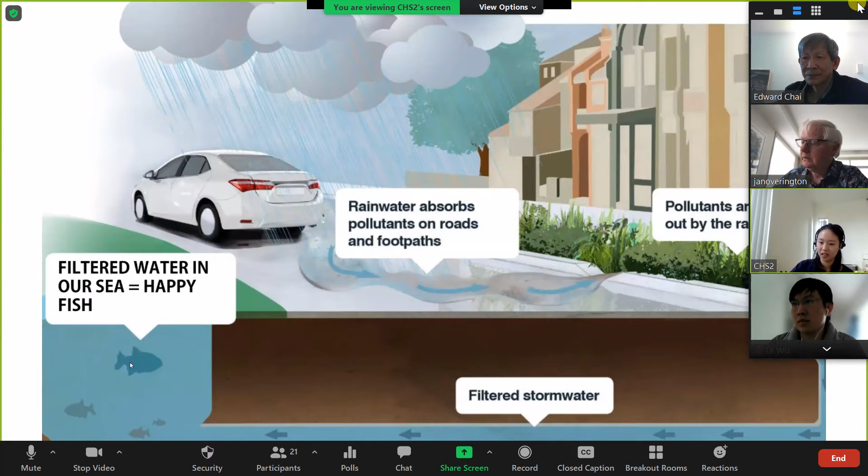This cartoon illustration shows why it's important to treat rainwater, especially on the road carriageway. You can see all the pollutants on the road and the footpath. Contaminants will be washed into the rain garden, it gets filtered here, draining out the filtered stormwater discharge into streams or water bodies. So clean water equals happy fish.

This is a section of rain garden from the Auckland Council Design Manual. It has 6 key components. The type of soil media needs to be approved from Auckland Council, usually an approved supplier.

Depending on the underlying subsoils, stormwater may then infiltrate to groundwater or be collected and piped to the discharge point. The ponding on the surface of the rain garden is called live storage and is designed to dissipate over a period of 24 hours as a function of media permeability and evapotranspiration rates. For the type of plants, you would want to plant hardy plants to suit extreme wet or dry conditions.

The under-drain system is for the pipe to go into the network. The location of rain gardens usually includes roadside verges, traffic islands, parking areas, and sometimes around existing catch pits, so you've got an outlet point. They're usually incorporated as part of the landscape design.

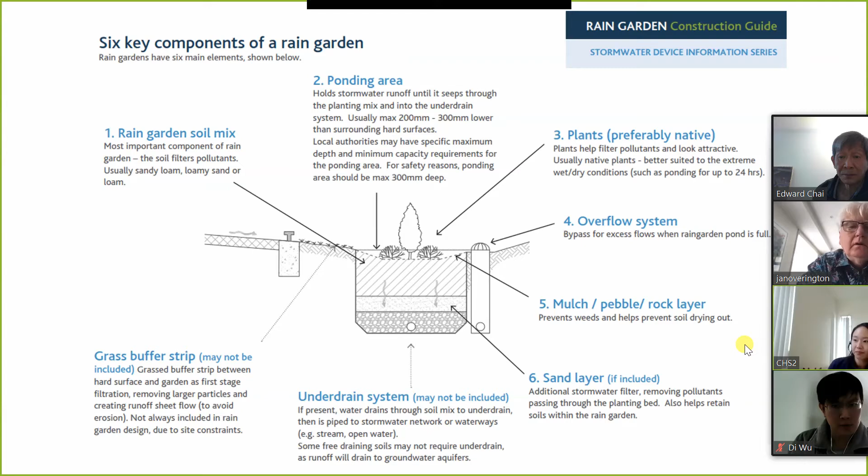Swale, I'd like to touch a little bit on swale. The function of a swale is vegetated with flood tolerant, erosion resistant plants. The design of a grass swale promotes conveyance of stormwater at a slower controlled rate. It acts as a filter medium, removing pollutants, while allowing stormwater infiltration. The typical location for swale is next to impervious surfaces such as parking areas and roads, and it can potentially take up the place of a curb, gutter, and pipe system.

That's what I did for the project I showed for the 90% developed design. We had swale next to the carriageway, no curb, so water can just go into the swale and get treated, then use the pipe system and go into the sea outlet nearby. So it plays quite an important role to soften the area, because if you've got too much concrete and asphalt, it doesn't look nice.

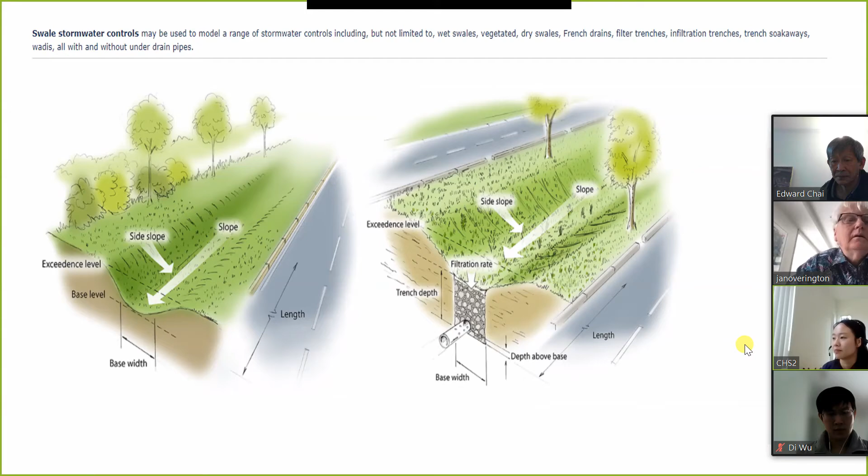Wetland. Depending on the size of your development, wetland can be a good method to attenuate and treat your flows. They play an important function, including attenuating flood flows, water quality treatment, and support of aquatic plants and wildlife. It works as a detention, fine infiltration, and biological absorption, removing contaminants at the same time. The wetland design guidelines can be found in Auckland Regional Council TP10.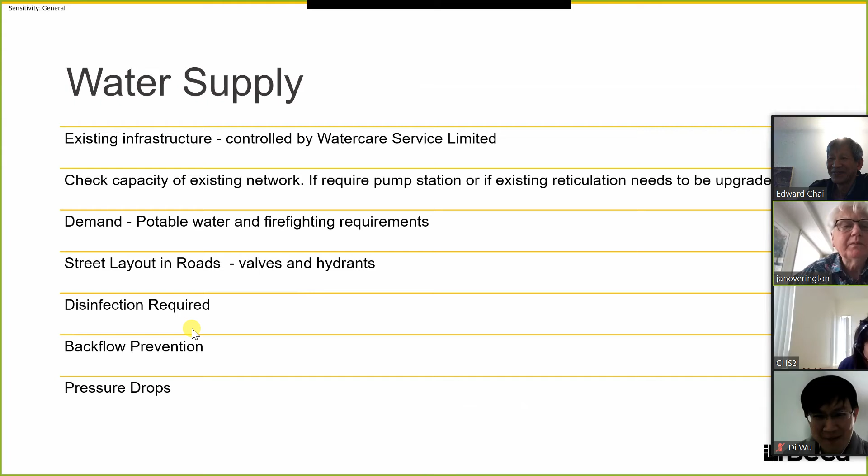Now Joey, you're using up all our time. I think what we'll do now is skip the water, wastewater, and services sections, because they're all written there and self-explanatory.

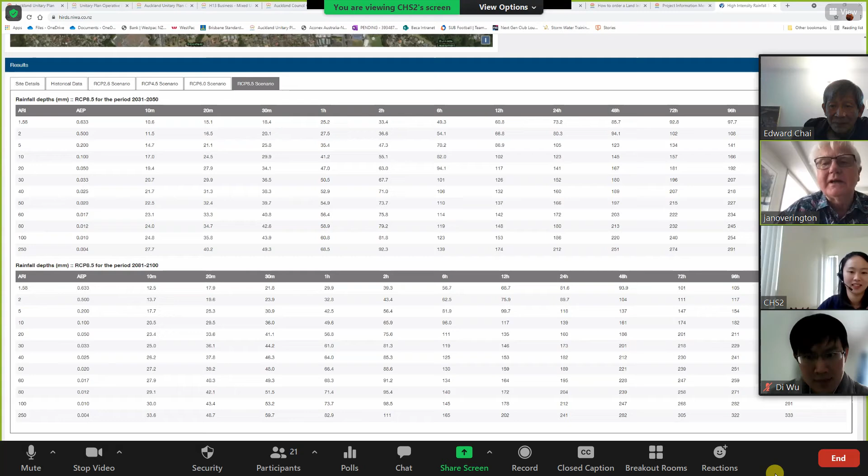I think we should go to the example now that we were looking at, that feeds into the project they're doing, right? So if you could go to the Unitec one, because theoretically we've only got 20 minutes, and that should include questions and answers too. So if you could go to the Massey site, that's that one. I'll quickly go through this, and if we can go back to the others, we will, but let's see how we go. Okay, next one.

This is a site in Albany, at Massey University, which you may or may not know. That's the sort of zone we're in, and in the middle of that picture is some spare land that was identified by MBIE, the Ministry of Business, Innovation and Employment, because of our lack of housing in Auckland, they were looking at surplus land related to any government institution.

Let's take the next picture. The areas outlined in red there were areas of land that the university says they probably won't be using in the future. So we split it into four areas, looking at this on behalf of MBIE. The southeastern area, that's the bit to the right, that tongue of land, has very poor access, with Bush Road being the road to the lower right. It's very close to a major intersection, and that land is probably best suited for the university to use in the future.

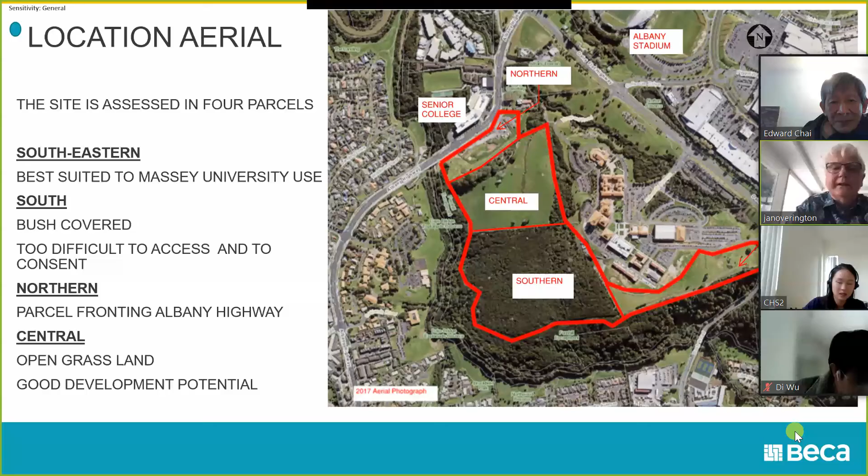Next one. This is the LiDAR. Now I was going to ask you, Joey, what does LiDAR stand for? LiDAR stands for light detection and ranging. That information is gained by flying over an area, and it's pretty accurate. However, it's dependent on things like the length of grass - on hard stand areas it's pretty accurate, within 25 millimeters or so. However, if you have a grass paddock and the grass is half a meter or 300 to 400 high, it won't pick that up exactly. In bush areas, although pretty, you can see the contours are pretty detailed.

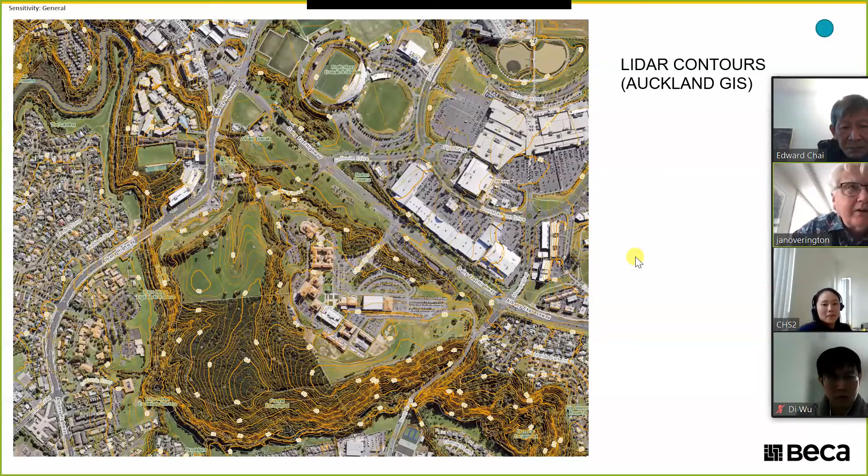It filters out any shots that hit the top of trees, but it actually picks up the ground level below, where it can see the land. So there's a filtering system for that. Okay, so that's the LiDAR, and that showed the area of the site.

So this is the bit of gathering information before you do anything, right. Next one.

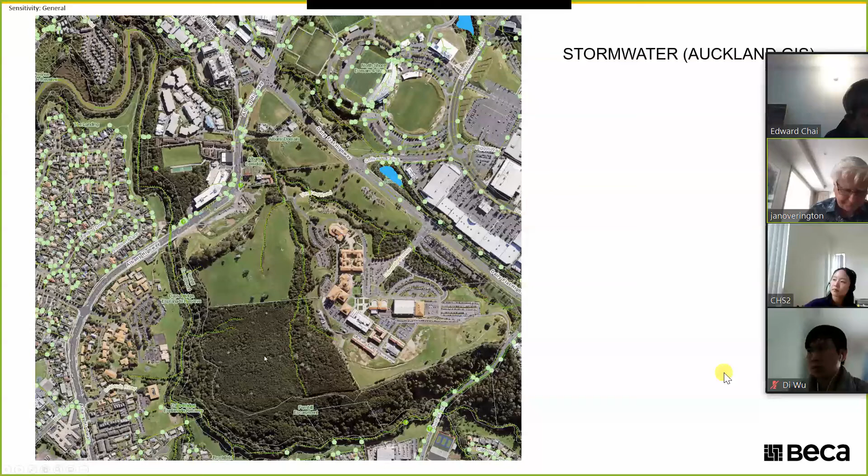Okay, next one, and this is the water supply. There's mains right past the area in terms of the big blue line you can see going along Albany Highway.

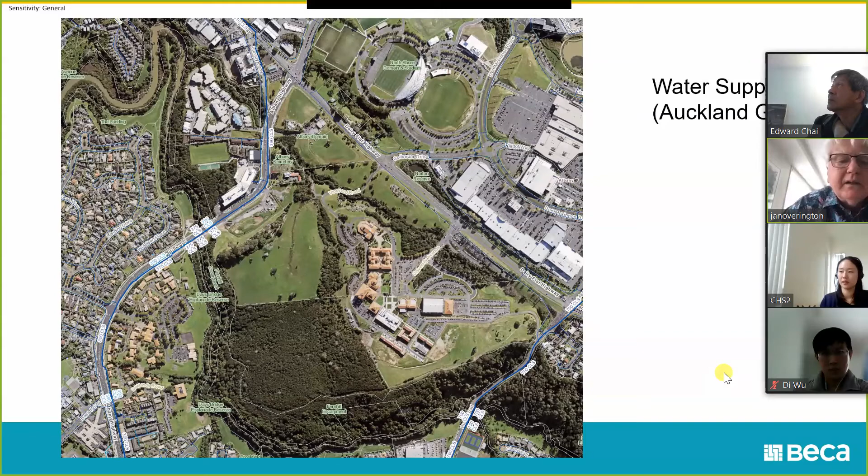I think the blue patch on the bottom there sort of shows where we're looking up into the site. That's the central gully, that small watercourse that went up through there. And the right-hand shot is along the top of the ridge above the northern area. Okay, so let's go to the next one.

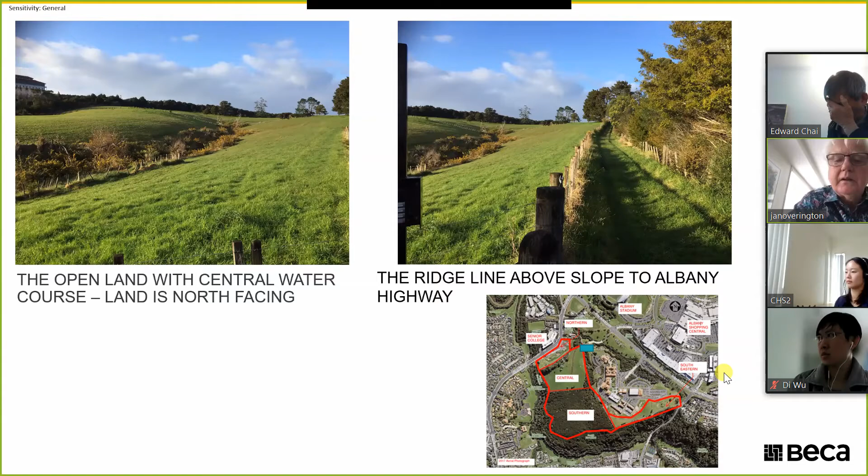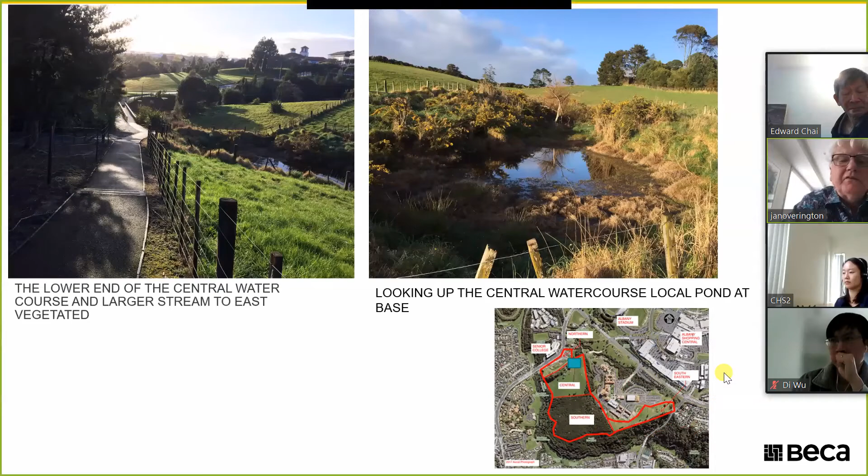And that is an access road into the Massey College. The first one is looking towards the east, looking towards the west, where a road would come off and follow up into that paddock you can see in the distance. And then the one on the right is where it exits onto the Albany Highway. So that's the sort of initial walk-over assessment you'd have - you'd walk over the land, and let's go to the next.

So I'm being very brief here because that's just the sort of information you'd get, and then you'd look at it and say, what are the constraints on the site? What are the good points?

The land off Albany Highway has good access. The site is going to be sunny most of the day. The trees above should be left - there are a lot of natives in there, as well as gums and things. They're on the south side of the site, so they're not a shading problem. And the site would suit high-rise development, 4 to 8 stories - good for apartments or even a retirement village, something like that.

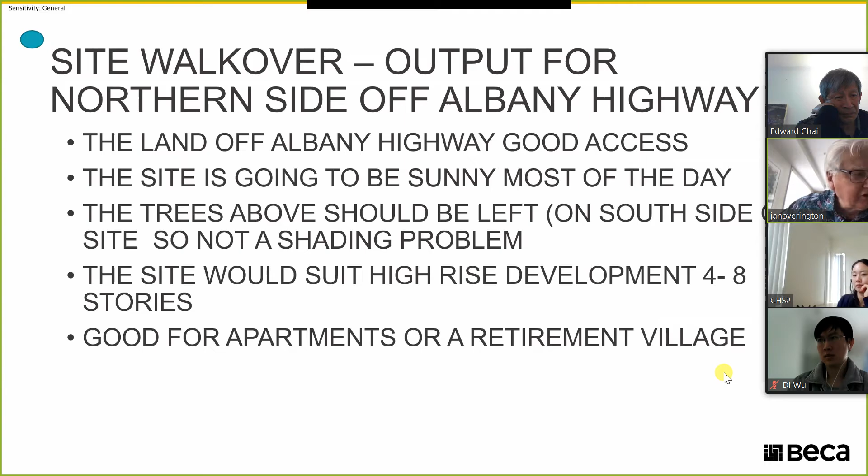So it's a small site, good access, good positioning in terms of the sun, and good access to transport and shopping centres, etc. Okay, let's go to the next slide.

Okay, next one. Then we have a look at the central area. That's a bigger site, 7.1 hectares. Now, the site access is an issue, and as is the central watercourse. But that central watercourse peters out just before that southern boundary, so it's more of an intermittent stream than a permanent stream.

You would have seen there was a bit of a pond at the bottom end, but that I think is an accumulation just of groundwater coming down through there. The access - there's that existing road to the east, and there's nothing wrong with that road. It could give good access into that site by continuing it up through across the watercourses and into the area.

So central watercourse, always an issue. Council do not like filling any watercourse, and if you do, you've got to pay for it by an offset cost. It could be money that they go and use elsewhere, or something that you do to enhance the area.

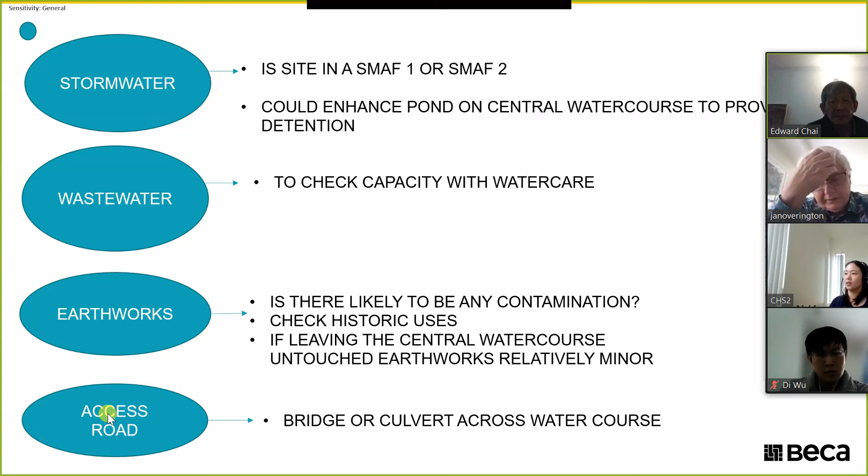So let's go to the next picture. The things you need to think about: is it in a SMAF area? That's a flow restricted area. I haven't determined that. You could enhance the pond on the central watercourse to provide detention if you had to.

Wastewater, you need to check the capacity with Watercare. Is there likely to be any contamination? Probably pretty unlikely in that area, but you'd need to check the historic uses.

If you're leaving the central watercourse untouched, the earthworks would be relatively minor. The access road would probably need a bridge or culvert across the watercourse, and a bridge would be best, but expensive. A culvert, you've got to think of fish passage and things like that - that's where the ecology comes into it.

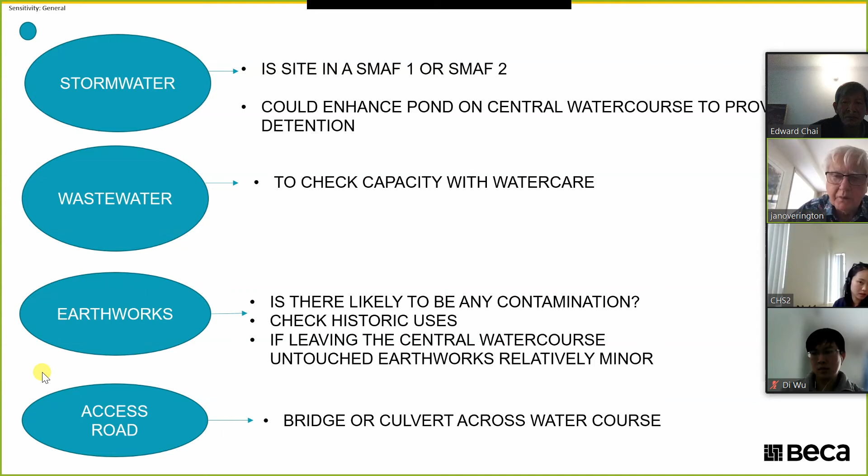We often, when we pipe watercourses, are required to provide little rills or ridges within a pipe so that fish have a chance to swim through it. They use the little restrictions within the pipe where water ponds, and they can rest in those areas, right? So, next one.

Yes, and then you'd have links through to the Fernhill escarpment and the areas you left in bush. So you can see that's just one thought, right? There'd be other options on that.

So that's the potential layout of the central area. Now that's all I wanted to say about that.

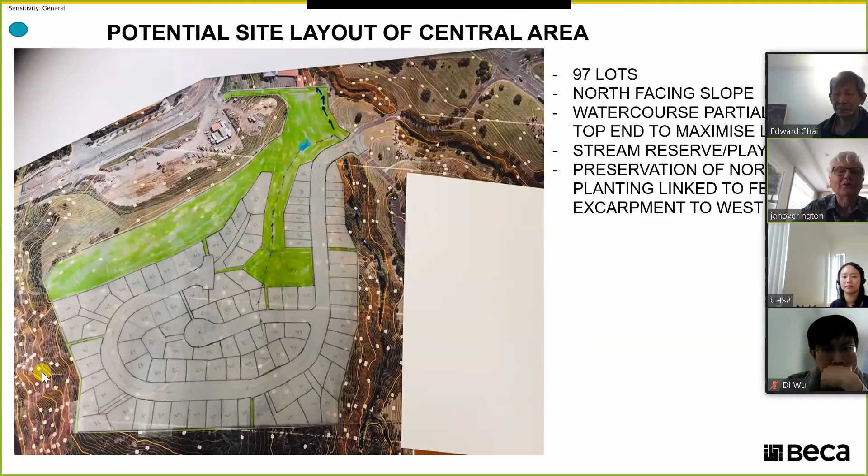But the next slide, and we're coming towards the end, this was included because what makes a good civil engineer? That made me go around my colleagues and ask them. So I went around senior people at Beca and said, what makes a good engineer?

These are the responses, and you can take whatever you like from this. I thought these were all good ideas for what makes a good engineer, a civil engineer.